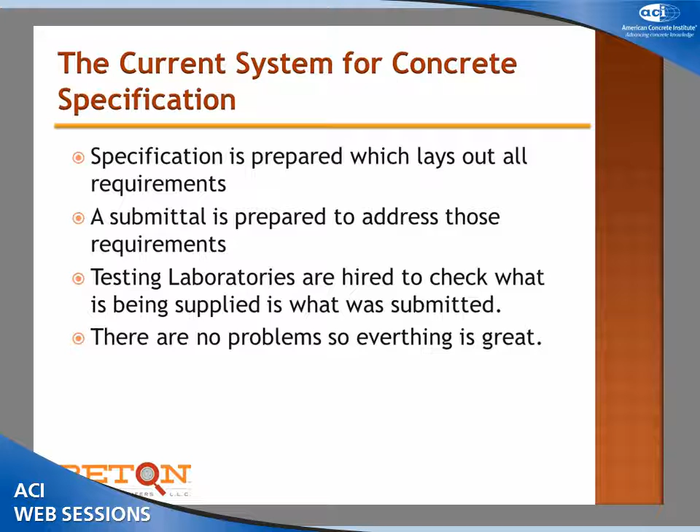And then a testing lab is hired, and they check off the box that says what was submitted was what was supplied. As a result, there's never any problems, and everything goes great, right? That's why Jeff doesn't have anything to eat, and that's why we're all sitting here at 9:20 on a Sunday afternoon. I say afternoon because if I say Sunday evening, I'll fall asleep. So there's no problems, and that's not really the case, right?

These fellows here, he's a load returning to the truck or to the plant for another load of concrete. Here's a load being distributed from the batch plant. This fellow is getting ready to build the falsework, and it's an auspicious day. The contractor, the designer and the owner are there. They're making sure not to watch, because even they know that they might not be getting exactly what they want.

For those of you who may be a little bit interested, blood is an excellent air entraining agent, and so I'm sure that if they found someone who wasn't meeting the specification, that's why some of those Roman structures are still there, because for that reason they're somewhat air entrained.

And I went to a presentation at an ACI conference, I don't remember where, and I learned something very interesting. Bryant Mather said concrete only fails for two reasons. It either fails because you didn't follow the specification, or because the specification was wrong. That was an education for me, because I had only seen didn't follow the specification. I didn't realize that the specification could be wrong. It was a very interesting piece of information.

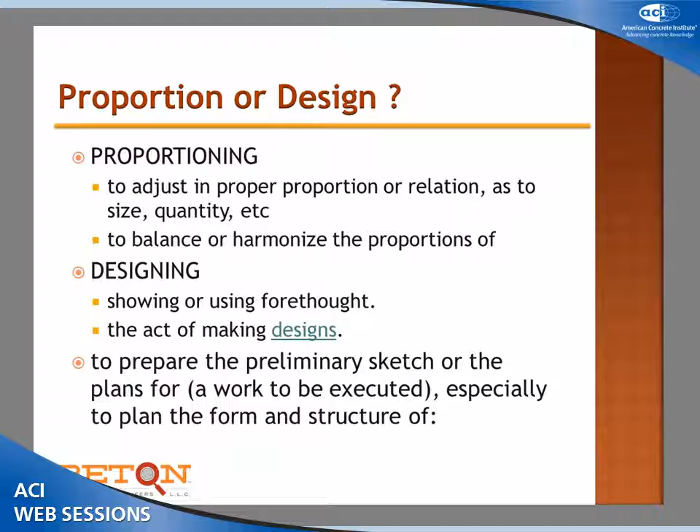We'll form a subcommittee. So we have proportioning, and many of us use the words mix design, and many of us may realize that the ACI does recommend we say mixture proportions, because often we're not designing the mixture. We don't set any of its properties. We're proportioning them to meet something else. So that starts to be where we're going down a slippery slope now, right?

Because the ready-mix producer has at least two masters. Those two masters are the owner, who has a written document. He also has other unwritten owner requirements, typically. And some of those are shrinkage, curling, appearance, cracking, longevity, right? How long does a building last? It'll last forever.

If it doesn't last forever, it must have gotten bad concrete. And of course, we know that's not the case. And then I was involved in a project not too far from here where the specification said, and I quote, the building shall be designed to have a 100-year service life, period. And they went on to talk about something else. I don't know what that meant.

But I do know that the contractor was very good. They said, Kevin, you can figure that out for us, right? And you'll tell us that your concrete will have a 100-year design life. Which of course we said, how the heck can we do that? It doesn't make an awful lot of sense. We go on and look at this process. If the ready-mix producer is being held responsible for a 100-year design life, guess what I have to control?

I have to control, for chloride ion corrosion, two things: the permeability of the concrete and the clear cover. Because if I have very impermeable concrete and the steel is only a quarter of an inch below it, I probably won't get what I want.

Now, Ontario had a specification for a long time, with limits for bridge decks on clear cover to reinforcement. And that clear cover to reinforcement was a one-tailed failure. It could be too close to the steel, but it was never set up to be too far. So guess what? If 2 inches of cover was good, 6 inches of cover was great. If you calculated the additional concrete that you had to put in versus what you got out of the additional bonus, you were golden anyways, and away you go. So that became a two-tailed failure.

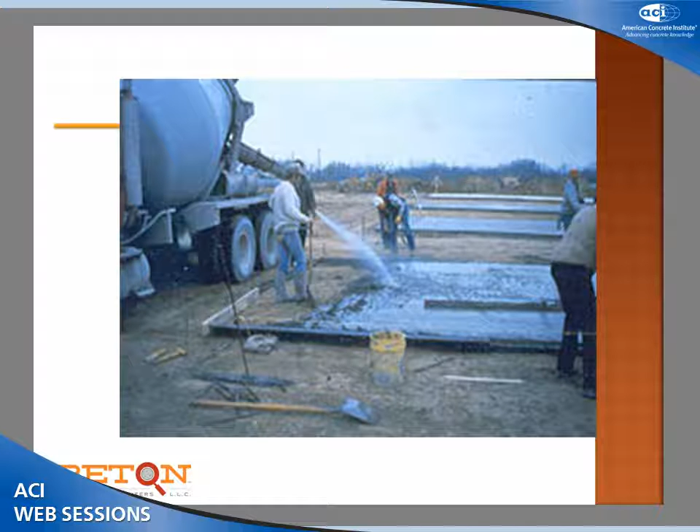So where do we go? It's easy. Performance-based specifications, right? We've known about them forever. Here's what I want. Your concrete should pour like Niagara and have the strength of Gibraltar. That's the Canadian experience, right?

This was not really possible, right? You could make pour-like-Niagara concrete. It wouldn't have the strength of Gibraltar. It might have the cracks of Gibraltar. Similarly, if you wanted high strength, you got those sticks out that the Roman guys had and you pounded the concrete in place. We've gone away from that, and that leads us to a problem as well, because once upon a time, for a given set of concrete mixture proportions, if you added additional water, the slump went up.

Now, it doesn't matter. Slump's very useful if you're making concrete, because if you think you're doing the same thing and you take a slump and then you run another batch, right? That's how concrete's made, like cookies in small batches by elves in trees. If you check that second batch and the slump is different, you didn't do the same thing. You might be aware you didn't do the same thing, or you might be finding out you didn't do the same thing. So very useful quality control tool, absolutely useless quality assurance testing.

And I think this is the point Kaz was trying to make. You can run into a problem. If I say that you can trust me because I know that my concrete will last for 100 years, and you're foolish enough to just take my word for it, which gets to Julie's point, you can run into trouble.

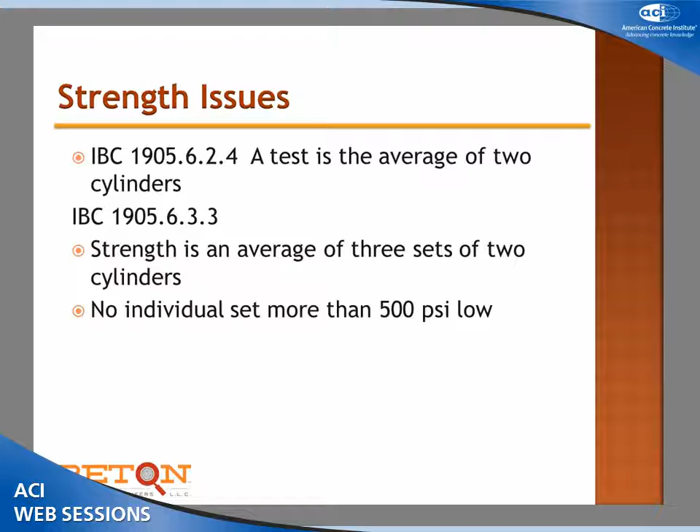So your standard deviation, I got my little abacus out. I didn't use a slide rule. I used an abacus and said, yeah, have your standard deviation, set the dial on the plant to 400. You'll be fine. How do you do that? I don't know. I didn't write the specification either. I don't think it's constructible. I said, that's where you should start. And they said, oh no, it's too late. We signed the contract. So you have to be careful about that as well.

But here's the real interesting problem. This is a slide, apologies to the Braun Intertec people in the room. Braun Intertec cast a bunch of samples years ago, Greg, you were probably in grade school, for a very large research project, and they couldn't figure out why there was so much variability in all of the data they were getting. And then I dug through the archives, because I was working for Braun at the time, but was not at the time the samples were cast, and lo and behold, this is why.

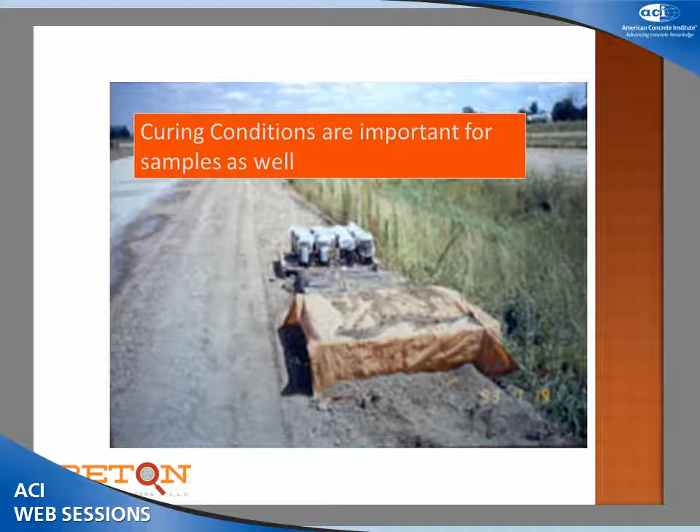Those cylinders are not representative of what's in situ, because they're getting a little bit warm, and the best way, of course, to get them warm is to put them in black molds here. But if you can't do that and you want them to stay warm all night, put some aggregate up there to retain the heat. So we do have some problems, and this is a testing lab I have a great deal of respect for, that could happen to anyone. In fact, it never happened to Cemstone because, of course, we never had to report our results to anyone.

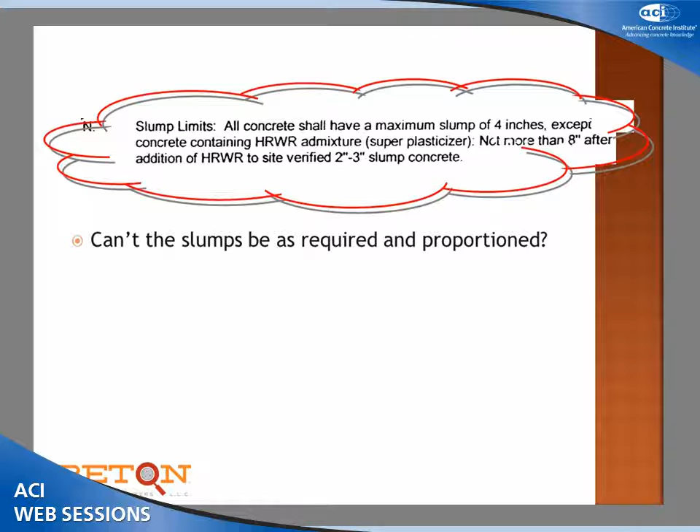That's requiring you to do one of two things: pump 2 to 3 inch slump concrete, which seems silly to me, or verify its slump, add the high range water reducing admixture, then don't look at the air again. The air is going to change because the workability is going to change. This becomes a problem. So why can't you just say the slump should be what's required?

In fact, when I write specifications, which I do from time to time, and I have my druthers and start with a blank page, I say the slump shall be suitable for the intended construction method without segregation, which I define because I can't remember the ASTM number, but there's a nice one for self-consolidating concrete, and so I say visual stability index as measured by this method of 1 or less, which you can do on a regular slump cone. At a 10-inch slump, you will have a pretty good VSI. If it's not segregating, if you haven't interfered with the water to cement ratio, you're fine. If you have, you can get by with strength.

My favorite test method to measure is the resistivity of the concrete at exactly 24 hours, because that you can relate to the RCP at 90 days if you get a correlation.

I spent a lot of time in Toronto, and I had the great fortune of working with John Bickley and my father for a very short period of time. My father couldn't stand me, and John Bickley went off to do something else.

But in both cases, I learned from there that 7 days is too long to know whether you have made the right concrete. You need a test, an index test at 24 hours if you're making it, because you can make a lot of concrete if you're paving JFK. How do you know that 120 days from now you're not going to get, hey, you're getting 50%? Bill, you need to know when you're making it.

When you're making 200 cubic yards of concrete an hour, you can figure out what that is in pounds per minute. It's very high. You are making concrete to an acceptable standard, and you have good people and good equipment, you still have some variability. Things do go wrong. You need a system that catches them.

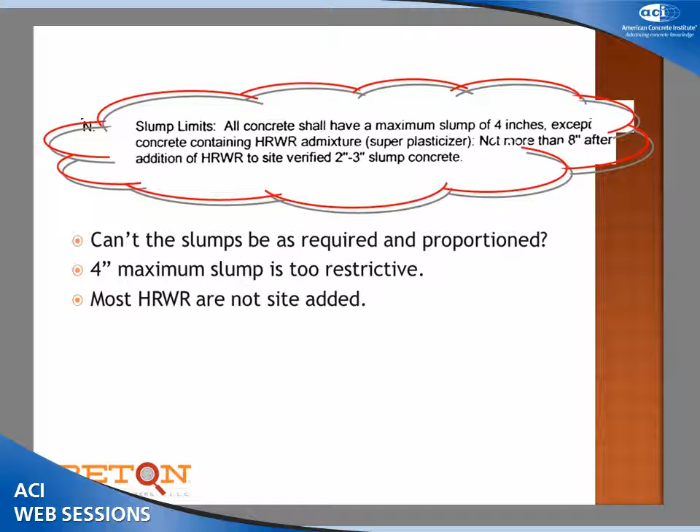Most high-range water-reducing admixtures aren't site added. And why have an 8-inch maximum slump when we know that we can make a 25-inch spread on the ground that has an RCP at 90 days of 100 coulombs passed? It's fantastic material. What's the compressive strength? I don't know. I don't measure it either, because it wasn't a design criteria for me.

Who knows what workability is best? Most of you who are designers in the room will know what's the one thing you should stay away from? Means and methods, right? You look in the mirror, you give your daily affirmation and say, I will not prescribe means and methods. But if you set the slump to 2 to 3 inches, you sure as hell have set means and methods.

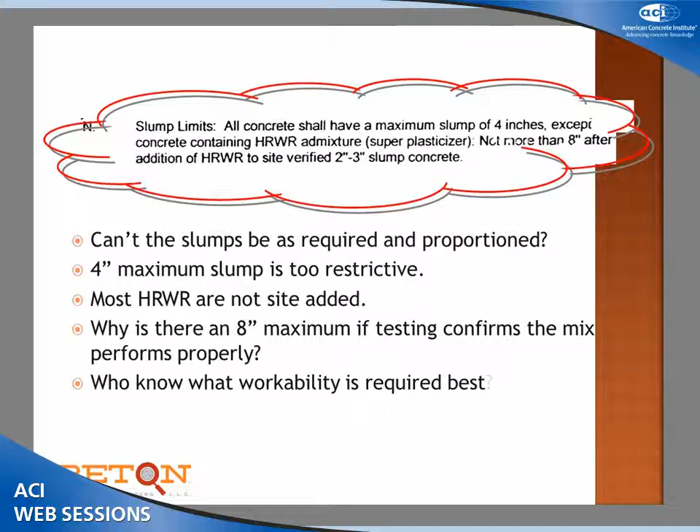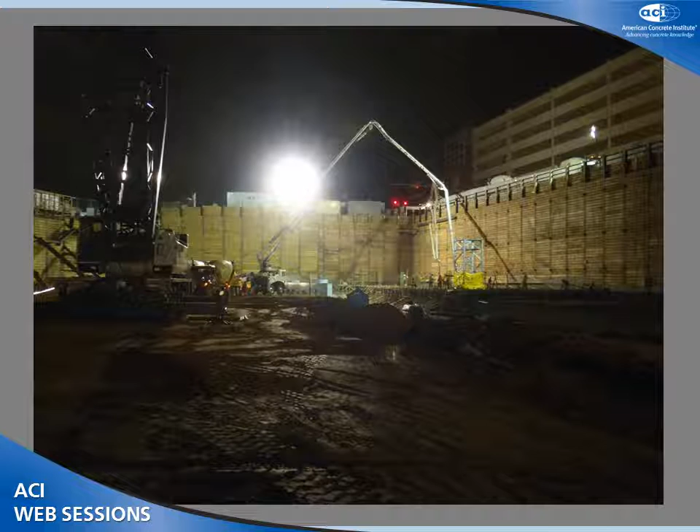Some of those concretes may not be pumpable, or worse, I might make them pumpable at a 2 to 3 inch slump. And then if I do that, I'm going to do lots of things that are going to cause cracking. Is the contractor going to be building like this? I don't know what's out in the distance, but it's much more interesting than the bucket apparently. Or are they going to be doing this? Two different concretes could meet the same specification but are being placed differently. Stay away from slump. It's a means and methods.

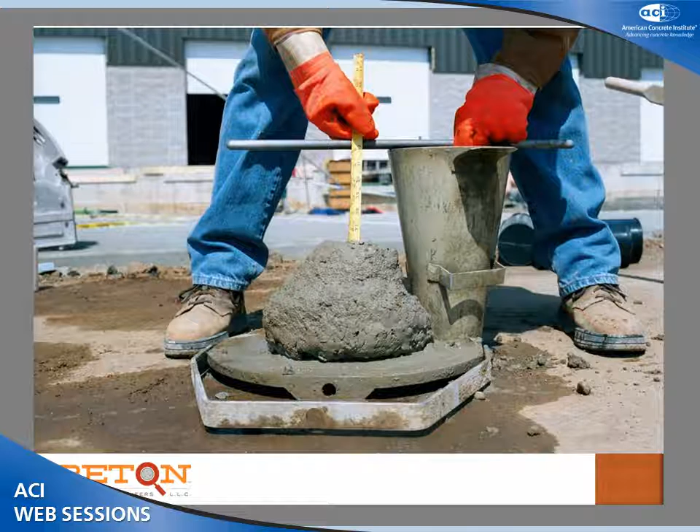This is the silliest device for measuring the quality of concrete. Very useful for measuring whether you are making the same batch or not. We covered that already, right? Segregation, that's what it looks like. It's pretty ugly, it's pretty straightforward, and if you get segregation, then you know it's occurring. You can see it in the hardened state, you can see it in the plastic state.

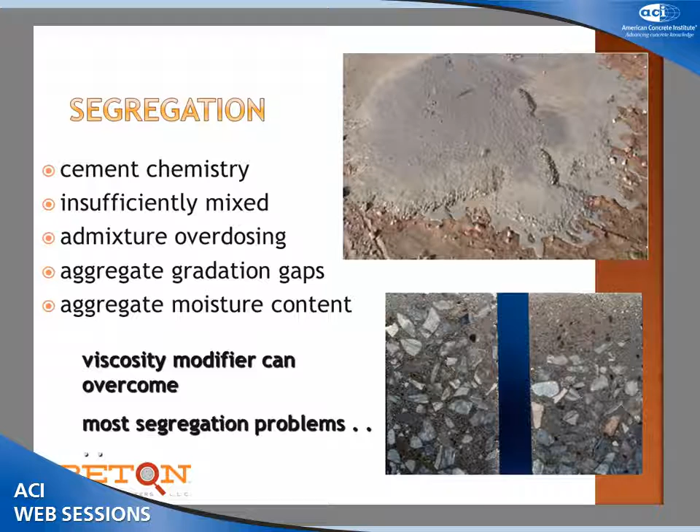This is a pavement section here that was taken from the trunk highway in Ottawa, Ontario.

I used to get 2 days of vacation a year in Canada. That's the other Canadian experience, because the weather looks like it does outside, so why would you want to be outside? You may as well go to work.

And as a consequence, I was off this day, and they took these cores. And they took the cores because the proverbial water valve had stuck on. I still don't know where that water valve is on the truck, and I can't find it. But what it usually means is there were a couple of hundred gallons of water in the load when it presented itself at the batch plant.

And you can see up here, these are cracks, and it's very badly cracked. It's a very good example if you're teaching people about mixture proportioning, because you can see here's the big rocks and the little rocks. It's really nicely segregated itself, but because I was out of town and they didn't notice, they cut it here and they broke it, and it met the compressive strength requirement.

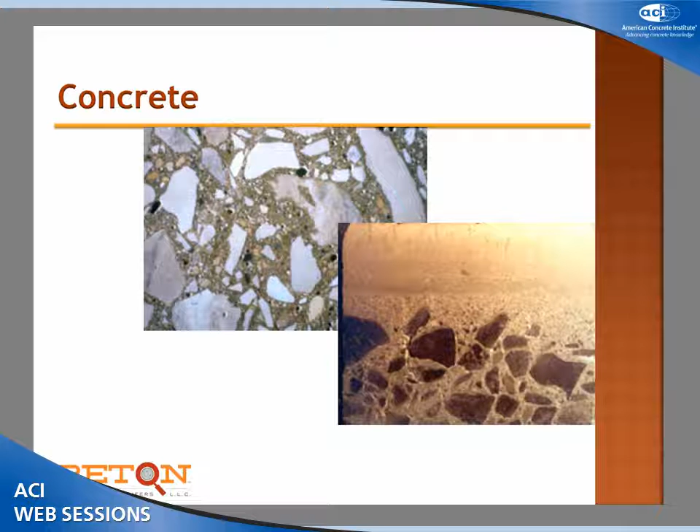So then they called me and said, what the hell do we do? It meets the compressive strength requirement. I said, can you still scratch the surface with your fingernail? 7 days old. Yes. So then you should tear it out. What do you think is going to happen when you put trucks with studded tires across it? It's going to be a problem. Compressive strength, a very bad number.

So you write a specification and you hand it to me, the ready mix supplier, and it says the compressive strength required is 3,500 psi, and you want a 0.40 water to cement ratio. Now, which one do you want?

And here's where you really fall into a trap, because if you measure strength and all the strengths are 4,500 or 4,000, you're going to be really happy, because I'm way over the specification. In fact, I probably never missed that specification, but you probably don't have a 0.40 water to cement ratio. In fact, I pretty much guarantee you can't, because if you follow this specification and you look at it as a reasonable producer, you say, I'm going to design my mixture to meet the more stringent of those two requirements, I'm going to have 6,500 psi.

If you go outside and walk a block from the hotel, you can see Target's headquarters. And so the Target people call me up and say, we don't like using your concrete. So why not? Well, the strength is really, really high. Yeah? It's like 6,000 or 7,000 psi, 28 days. Yeah. Well, it's specified to be 3,500. It sure is. And it's specified to be a 0.40 water to cement ratio. And since the 0.40 gives me 7,000, what do you want? Well, I want a 0.40, 3,500 psi concrete.

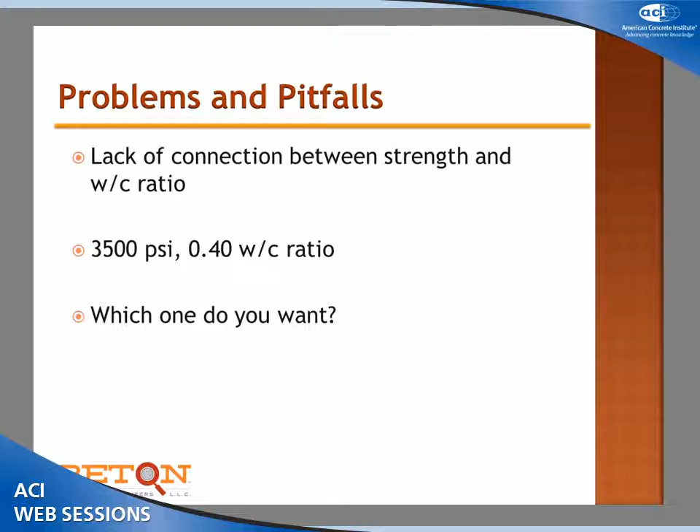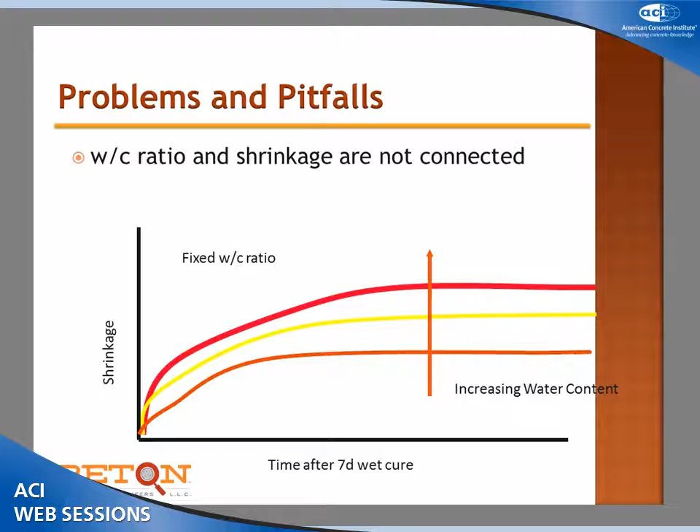So you do end up with a situation where the supplier here has an ethical dilemma. Do I meet the strength? Do I meet the water to cement ratio? Because water cement ratio and strength aren't connected. Just change the cement content at a fixed water cement ratio, increase the water content, increase the cement content, you get higher strength. Right? Abrams said, all other things being equal, water to cement controls the strength. We sometimes forget the all other things being equal.

Here's a couple of concretes. Both of them have a 0.40 water to cement ratio. The 600-pound, 240-pound of water mixture, that's going to shrink a lot less. Strengths will be same or similar, maybe a little bit higher for the second one. The permeability is going to be higher. Permeability is going to be higher at a fixed water to cement ratio, because most of the permeability occurs in the paste fraction, and you've got lots of it in this mixture.

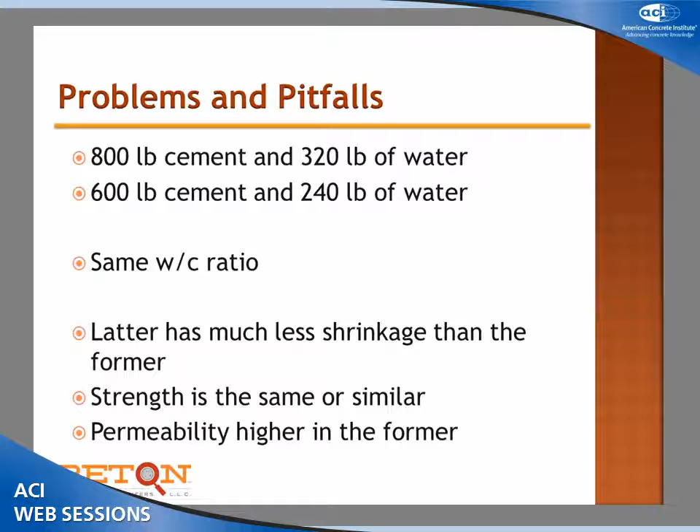What you really should do, and I had this long discussion with the new incoming head of the Department of Transportation, you don't buy plastic concrete, so stop testing it. You buy hardened concrete. Let me decide what is best suited for making that hardened concrete. You set criteria that we're going to match, and then we'll go along with that criteria.

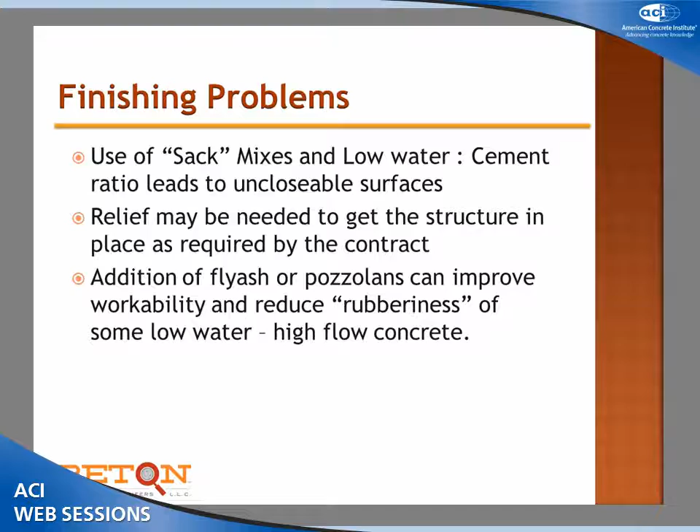We got lots of finishing problems, and they come from all sorts of other places. And then we have this discussion. I had these slides prepared before the responsibility meeting, but this is an issue that occurs very much, and the fellow left holding the bag, unless he can blame it on his material suppliers, is the ready mix operator. Because you say, well, your concrete has a pH of 12.5, and I said, that's because I put the Portland cement in that you specify. So you end up with this situation, who's to blame here?

We need to have much better performance criteria, because rarely in the ready mix industry when we deal with authority are we this successful. So what should the designer be responsible for, right? The designer should be responsible for performance. The problem we don't know right now is who's the designer.

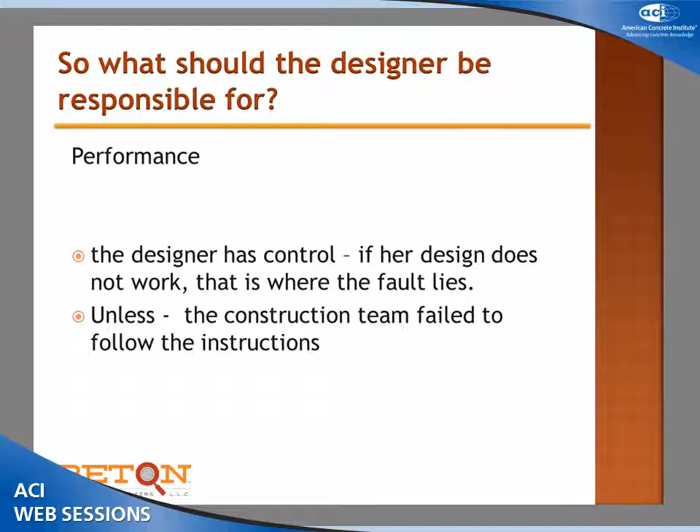The designer has control, right? If her design doesn't work, that's where the fault lies, unless the construction team failed to follow the instructions. That's what Bryant Mather told me in a presentation that I heard over 25 years ago. But if the designer is giving you such tight control over the mixture proportion that it's very prescriptive, if it doesn't meet what the owner wants, it's the designer of the specification of the building, a licensed design professional, who's at fault.

If it's performance, and I can't spell performance no matter how hard I try, you end up having a problem. That's a performance issue I have. But worse, we live in the world of the common specification, which is both and neither. So let's look at a prescriptive specification. And if you look at the back of the document, those of you who got them, you'll see that there is some discussion of prescriptive and performance specifications.

And if you have written a prescriptive specification that says, I need this much cement and this much water, and even if you have said I can choose the aggregate particles, I really can't make much of a difference because you've told me the maximum size and conform to C33, not a lot of freedom, then if I supply the concrete in accordance with the prescribed requirement, and you should conduct appropriate and sufficient quality control to see if in fact you have, or I should be able to demonstrate to you that I in fact have made what you said, then it's your fault.

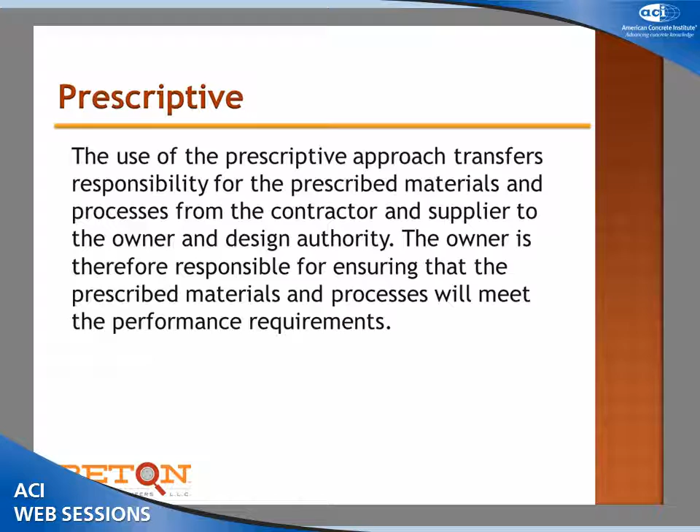You have taken on that responsibility, and it is unfair for you to come as the designer or the contractor and say your concrete didn't perform, because it's not my concrete. I proportioned it to your recipe. That becomes a problem.

In a performance-based specification, which is where we should go, you know that you can use laboratory permeability. You can be really nerdy like me, and you can use a diffusion coefficient. You can calculate the rate at which chlorides will go in. You can run a Monte Carlo simulation in Las Vegas, and it's a true story, for the I-35W bridge. I did it while in my hotel room at the World of Concrete. It's a Monte Carlo simulation to attempt to see how much risk I was taking on.

And say you want a 100-year design life. I don't recommend it as a specification because it's kind of confusing. But you can look and say, if I have this concrete, which I think I can get these properties for, and they'll meet your structural requirements, but you need to have 4 inches of clear cover in order to get there, and we have to get the concrete not to crack, which means a design issue and a materials issue.

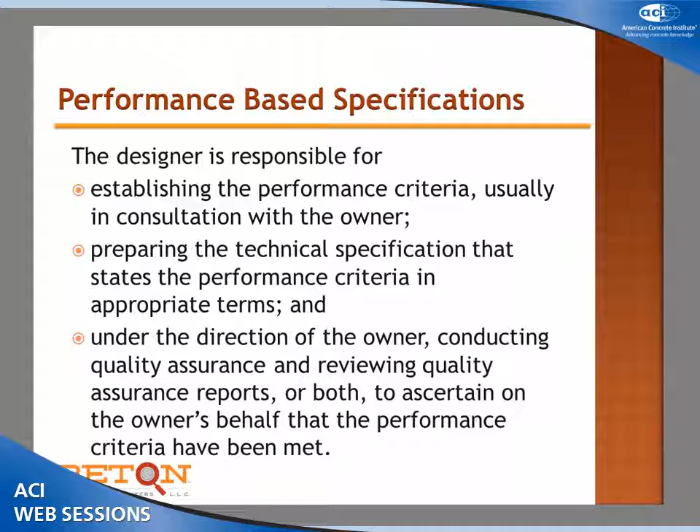Then under the direction of the owner, some quality assurance and reviewing quality assurance reports goes on, or both, to ascertain on the owner's behalf that the performance criteria has been met. Then the concrete supplier should be responsible for that. And in order to be responsible for that, he has to work hand in glove with the installer, which is a terrible thing because all that would do is promote communication. Jeff, again, would have nothing to do, and we'd all be in rough shape.

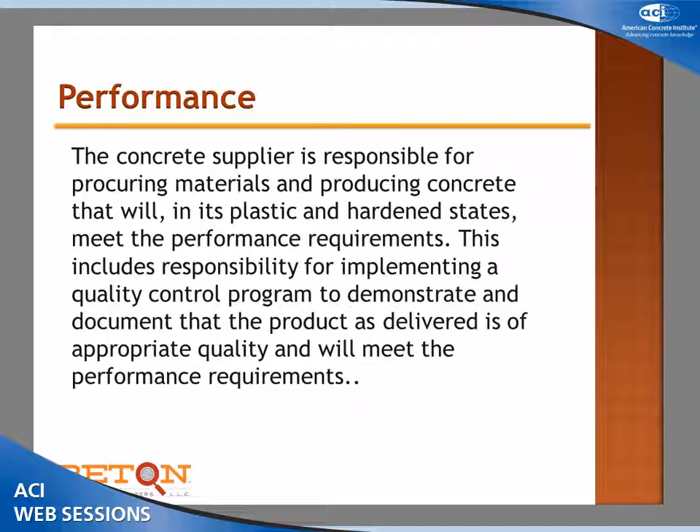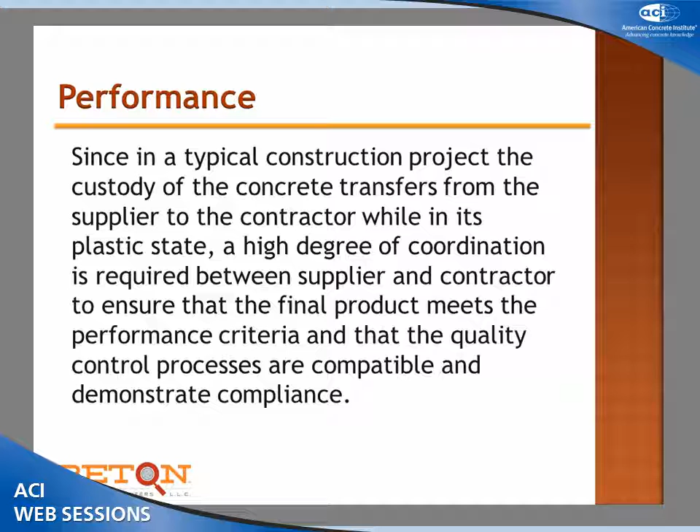Now, since, as I said, custody transfers at least a couple of times, curing needs to be important. In Ontario, they're going to propose that they're no longer going to cast cylinders at all. They're going to go to this bridge deck, they're going to take out cores, they're going to break them, and that's going to be the criteria, because they buy hardened, not plastic concrete. That will become a major issue between the supplier and the contractor, who should be talking anyway. But sometimes that doesn't happen.